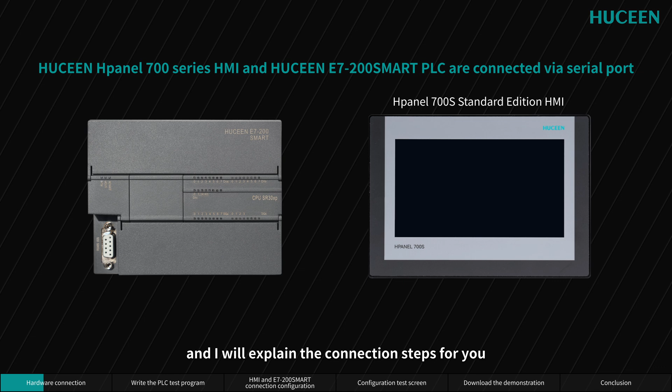Hello, everyone. Now, I will introduce to you the connection between the HUCEEN Hpanel 700 series HMI and the HUCEEN E7-200 SMART PLC through the serial port. Take the HMI of the Hpanel 700S standard version as an example, and I will explain the connection steps for you. First, establish the serial port connection between the HMI and the E7-200 SMART.

On the HMI side, select to use COM2 port. During the hardware connection, the positive terminal A of COM2 port is connected to the third pin of the DB9 port on the PLC side, and the negative terminal B of COM2 port is connected to the 8th pin of the DB9 port on the PLC side.

First, set the communication port parameters of the PLC. In the CPU properties of the system block, set the station address and baud rate of the RS485 interface. Here, set address to 2. Baud rate to 9600 bps.

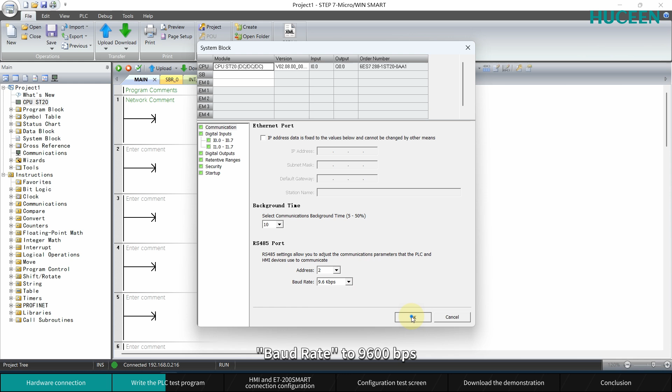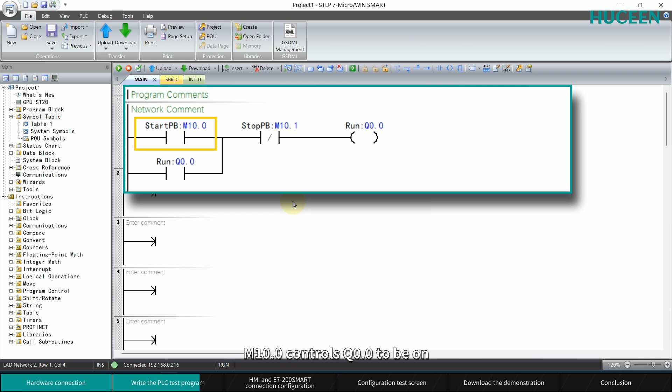Next, write an E7-200 SMART PLC test program. This is an output control program written in the main program block. Here, M10.0 controls Q0.0 to be on. M10.1 controls Q0.0 to be off. And download the written program to the PLC.

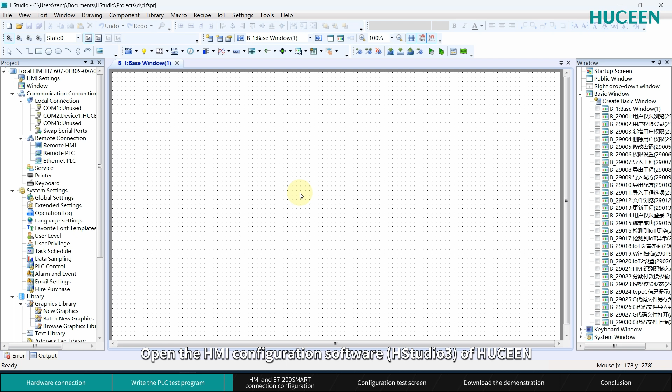Step 1. Select HMI model. Open the HMI configuration software, HStudio3 of HUCEEN, and create a new project. In the HMI device type section, select H7607-0EB0S-0XA0, and then click Next.

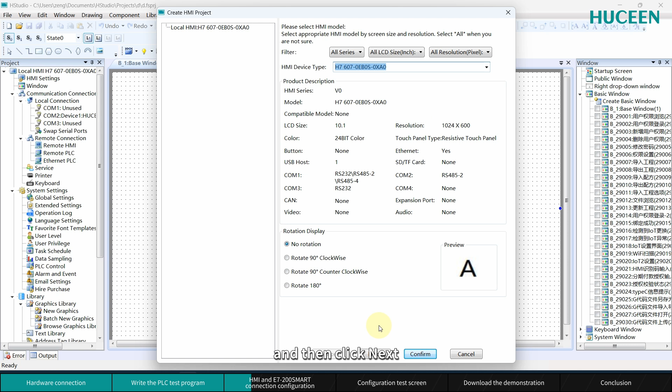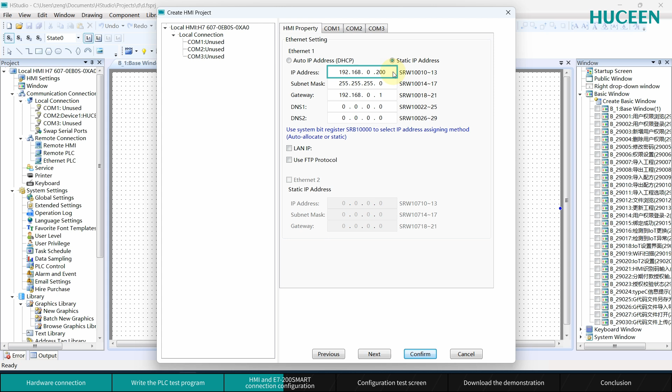Step 2. Configure HMI's IP address. In the HMI property of the HMI, complete the IP address setting of the HMI. The IP address set here needs to be in the same network segment as the computer to facilitate the download of the HMI program. Here, you can choose to set the HMI's IP address in a static manner, such as setting it to 192.168.0.200. After setting, click Next.

Step 3. Add PLC. Select the connected device in COM2 HMI as the master station. In the manufacturer field, select HUCEEN. In the device type field, select HUCEEN H7-200_PPI-M. Default station number is set to 2. Baud rate is set to 9600 bps. The station number and baud rate set here need to be consistent with the settings of the PLC system block.

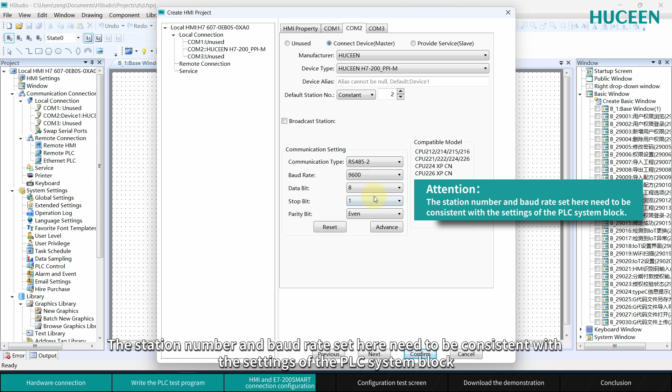Data bit is selected as 8 bits. Stop bit is selected as 1 bit. Parity bit is selected as even parity. After setting, click Next until confirmation. This completes the serial communication connection setup with the E7-200 SMART PLC.

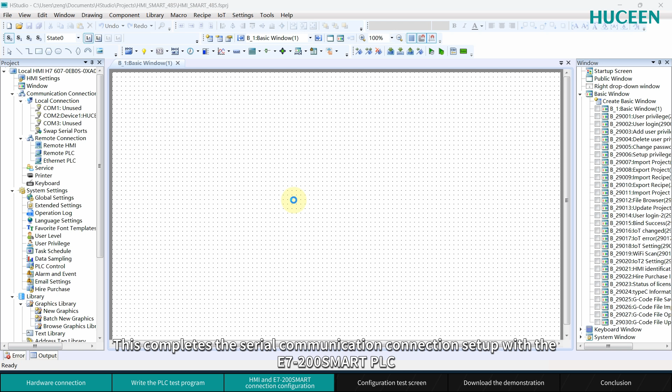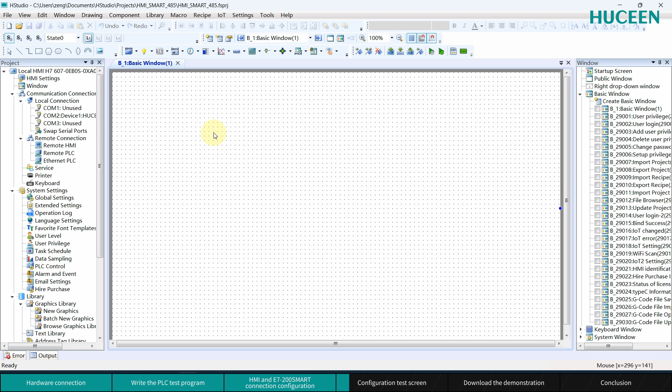Configure a test screen. Place 2 buttons on this screen to control the Start PB and Stop PB variables, respectively, and configure an indicator light to display the status of the run variable. First, configure the buttons. Select the Component Switch Bit Set option in the menu bar, and set the execution conditions in the bit setting property page.

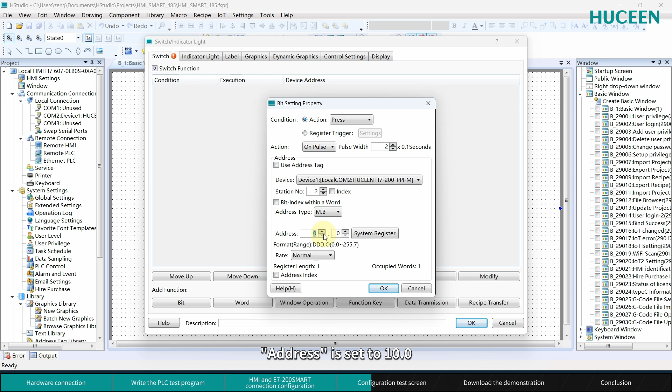The action is set to press. Execution settings set to on pulse. Select the connected H7-200 PPI MPLC for the device. Address type is set to MB. Address is set to 10.0. After setting, click OK. Click the label column.

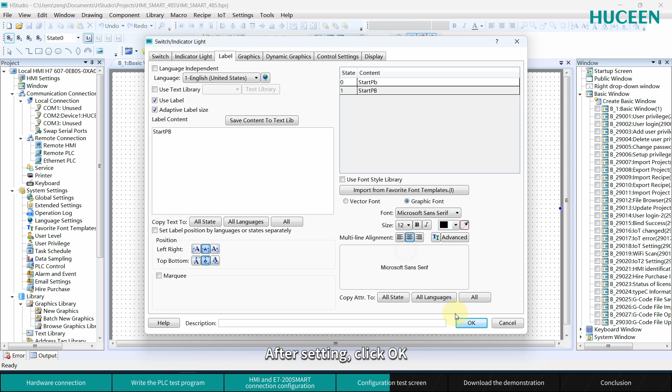In the label column, set the label content for this switch when the state is 0 and when the state is 1. Here, both are set to Start PB. After setting, click OK. At this point, a button can be placed on the HMI screen. Configure a Stop PB button in the same way. The associated address is 10.1.

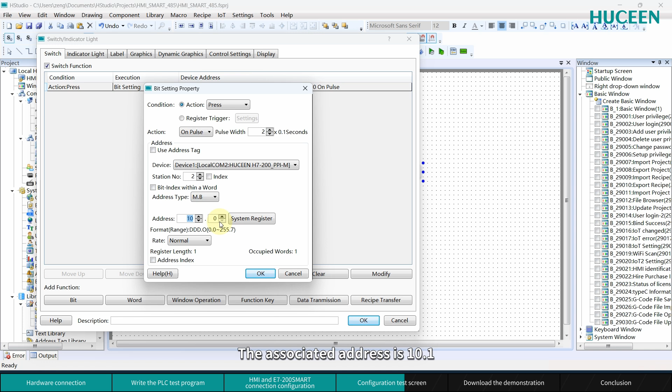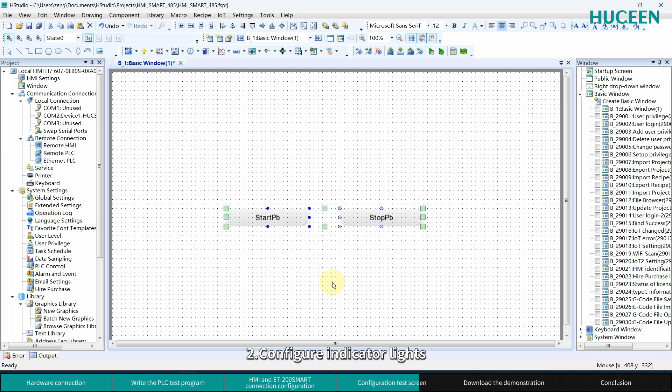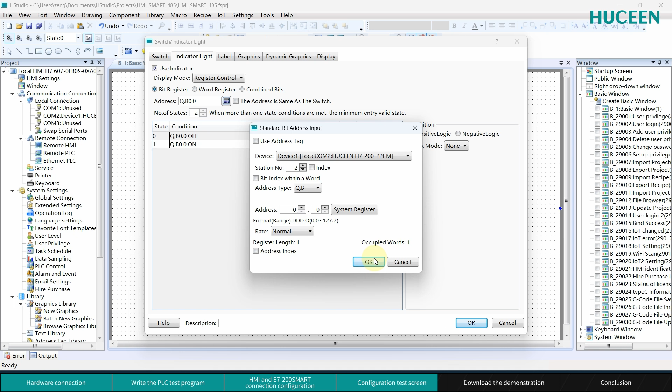Second, configure indicator lights. Select the menu bar's component Indicator Light Bit Indicator Light. Enter the Indicator Light Settings page. In the Address field, select the connected HUCEEN H7-200 PPI-MPLC. Address type is set to QB. Address is set to 0.0. Select a graphic in the Graphics option for it, and configure the display graphics in different states.

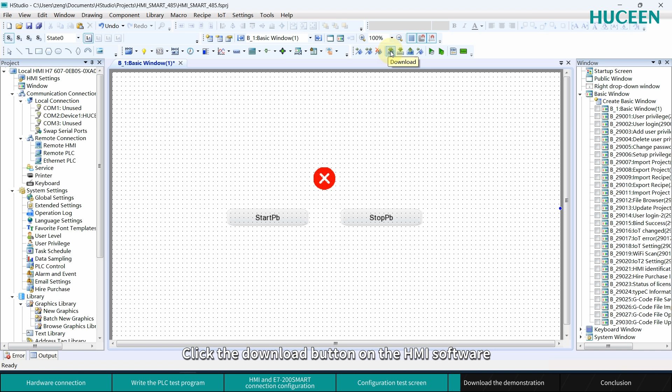Click the Download button on the HMI software. If you want to change the IP address of the HMI to the one set in the software configuration, simply uncheck the option Keep Current IP on the download interface, and then proceed with the download. Download the configured screen to the HMI.

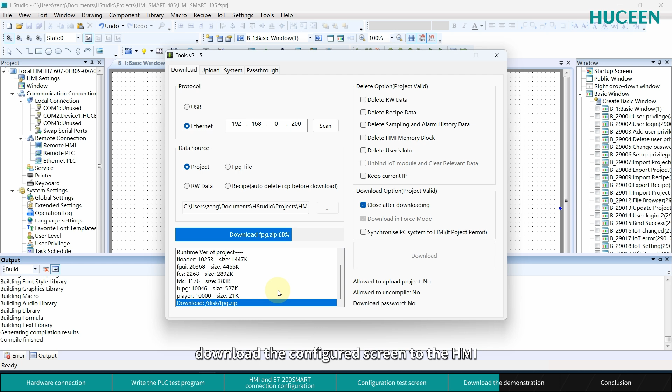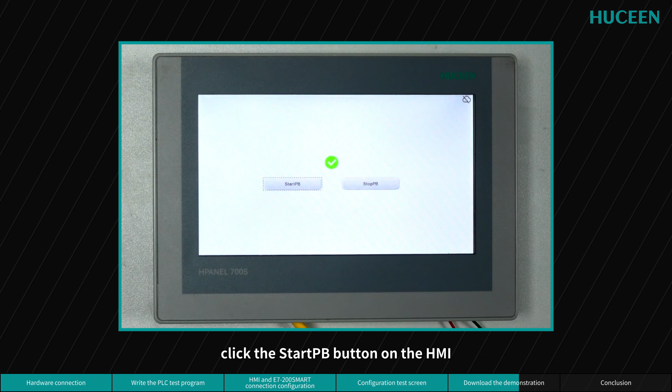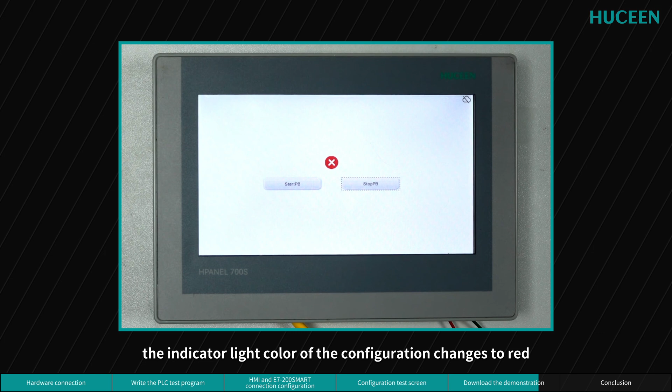After the download is completed, click the Start PB button on the HMI. You can see that the configured indicator light changes from red to green. Click the Stop PB button. The indicator light color of the configuration changes to red, indicating that the HMI has established a communication connection with the E7-200 SMART PLC.

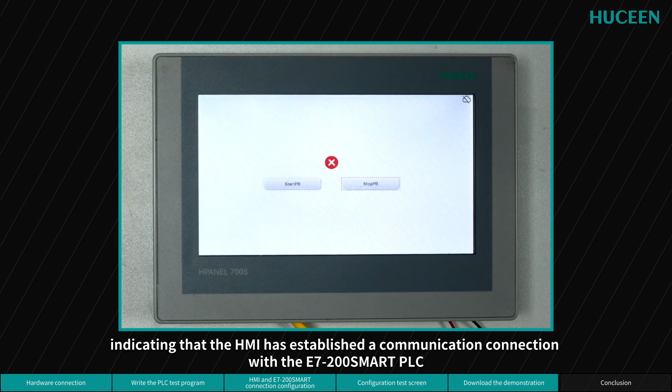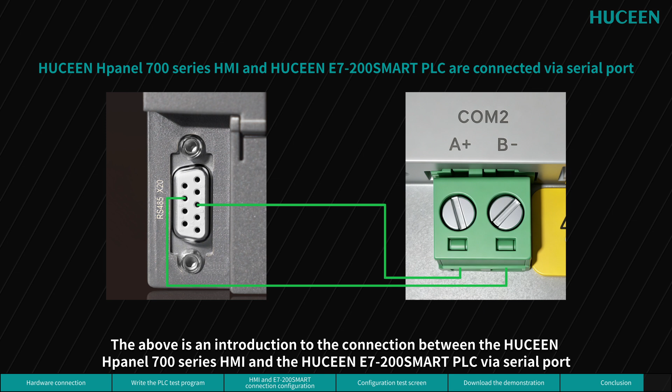The above is an introduction to the connection between the HUCEEN Hpanel 700 series HMI and the HUCEEN E7-200 SMART PLC via serial port. Thank you all for watching.